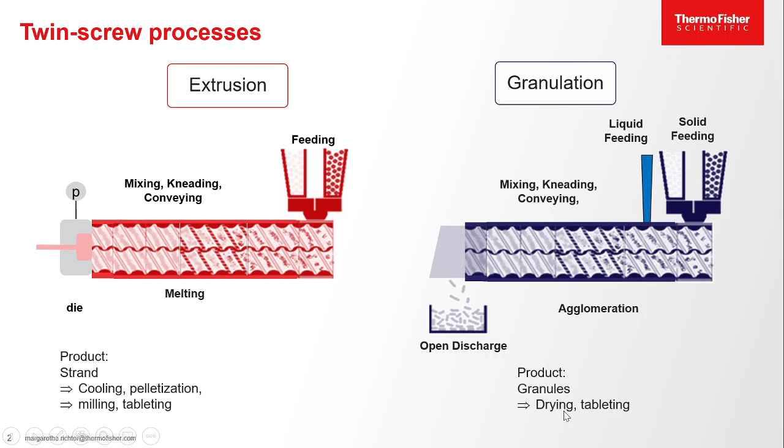And if we have a formulation that is mostly solid, that only has some binder or some liquid added into it, you'll have an agglomeration happening within this twin screw process. So along the screws, you mix the materials and you agglomerate them. So you increase the granule size. And after that, if you add a liquid, of course, you will have to do a drying and a tableting step. Let's look into the process in, let's say, real life.

So what we have here is a benchtop extruder, Pharma 11 is the name. And we have here a gravimetric feeder that's, in this case, feeding the blend. So the polymer with the active ingredient is fed into this funnel here. And then along the barrel inside here, we can set different temperatures. So the temperature profile can be set along, and we make this granulation happen along these long screws.

In the end, we have this discharge chute, and if we remove it just for visibility, this is what it looks like. You have the screws turning, and this is where the granules come out. The rest happens inside, so it can't be seen in detail. And this is what the granules look like. So you have an increased flowability of your granules based on that process. This is a melt granulation process.

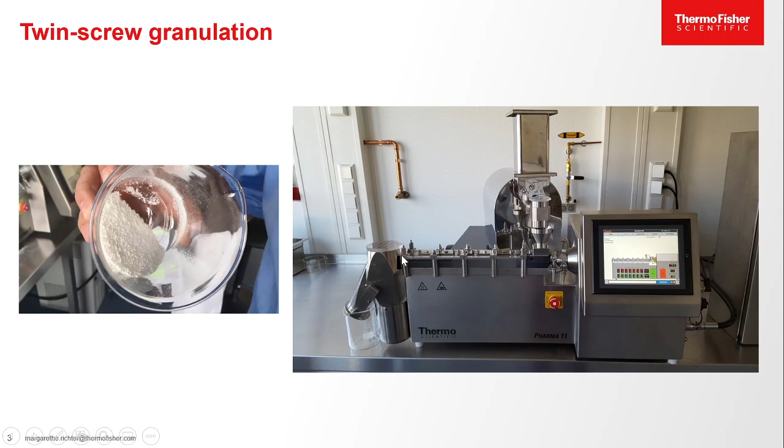I'll come to the differences in a minute, but you can also add a liquid at any point. So here are different plugs, and you can basically remove a plug and then add a liquid here or here into the process. And where you do it really influences the process.

The variables that help you to tune your process are basically divided here into independent variables and dependent variables. Independently, you can continuously change the screw speed, so how fast the screws turn. What's the feed rate, so how much throughput, how much material do I add within an hour, for example, into the extruder. Then the barrel temperature and the temperature profile, and also the liquid to solid ratio. So how much liquid do I add in order to get the granules?

Then stepwise, based on disassembly and then reassembly of the setup, you can change the screw design, so the screw configuration. This is really crucial. I'll come to that later, and also the barrel design. Depending on these changes, you'll get results. And these are basically granule temperature, so the temperature will change based on all these settings.

The drive torque, so how much does the machine actually have to work to perform the granulation, this will change. Also the residence time of your material within the granulator and the filling level inside the granulator. A twin screw process is never completely filled up, but it always has some void volume, and this of course changes. And then you get, of course, quality control parameters such as dispersion, so how well does the material disperse, how big are the granules, so granule size and distribution, and also the granule density.

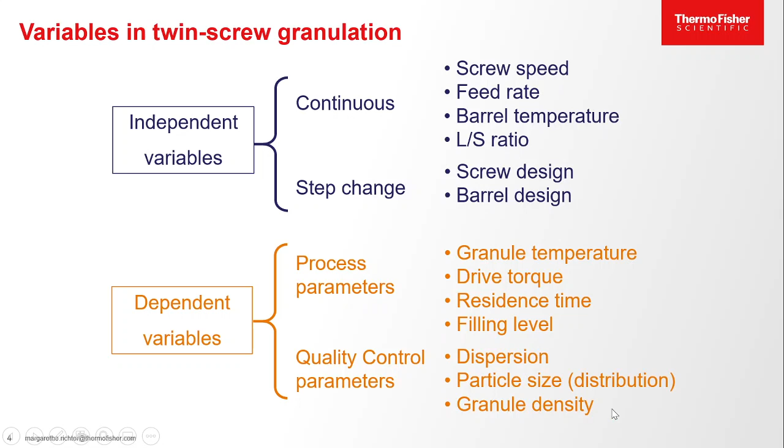And based on these parameters, you can basically change all this. But let's go through this in the consistent methodology. So this is what I suggest for this talk. We will first of all look into the type of granulation process, into the formulation, then into the setup, and then into the process parameters.

So looking into the type of process, well, as mentioned, extrusion and granulation is possible, but granulation also divides into melt granulation or dry granulation, or into wet granulation. If you work without a liquid, so you do a dry or a melt granulation process, then you will have basically a polymeric binder and no water or any other solvent. And you perform the process at elevated temperatures.

It doesn't have to be very high, but depending on the temperature, you can talk about melt granulation here. Basically, then you will have temperature above the glass transition of the polymer, but in most cases below the melting temperature of the API. So you really just melt the binder in this case. This is a very nice process because it's suitable for active ingredients that are sensitive to hydration and also to heat, because the residence time during the granulation process is quite short. So also the residence time at elevated temperatures is short.

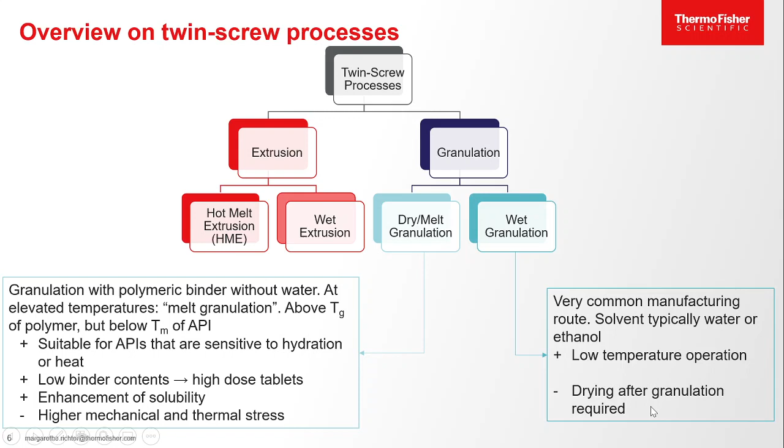Wet granulation, on the other hand, is a very common manufacturing route. Typically, different techniques are used, but all of them have in common that there's a solvent, typically water or ethanol, added into the process. If we perform this with a twin-screw process, then this granulation process is continuous, and this is the big advantage here, for continuous manufacturing. The process itself is performed at low temperatures, so this is a big advantage, but because you add a liquid, you have to dry the liquid afterwards, and you have the solvent handling that needs to be taken care of as well.

And if we look into the difference of the melt granulation and solvent granulation, I won't go into too much detail. You can have a closer look at this in this publication. But what you can see, based on metformin as an API, they made a case study and they got a lot nicer tablet hardness based on the melt granulation made granules. And the authors state that melt granulation was clearly superior to solvent granulation. So it makes sense to look into it and compare it.

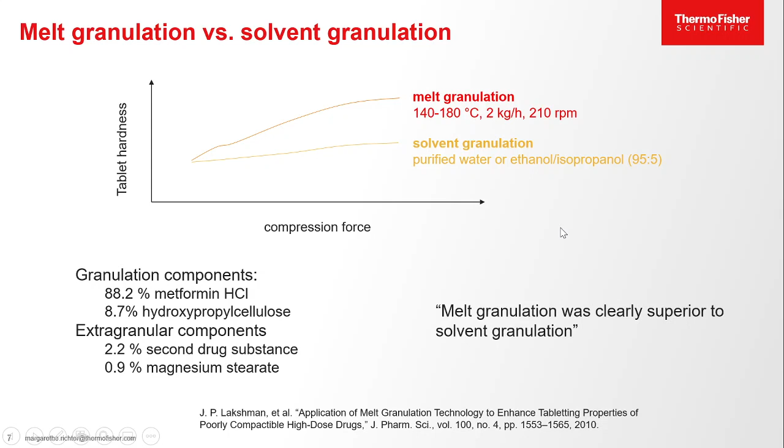Then let's look into the formulation. Well, basically you can have a pre-blend or a split feed. So you basically feed your solids separately, and let the extruder or the twin-screw granulator do the work of mixing. Then you can choose different liquids. Of course, what kind of solvent do we want to work with? And you can add the binder into the solvent or into the pre-blend. And this is a question we have discussed in this slide.

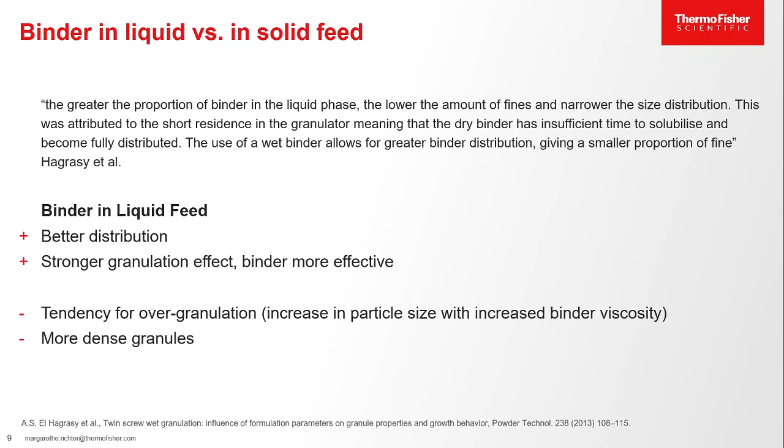There's a little bit more in this publication again, but in a nutshell, you get a better distribution and stronger granulation effect, so a more effective binder, if you add the binder into the liquid. But you have also the tendency to overgranulate, to make lumps and really large particles and to get quite dense particles.

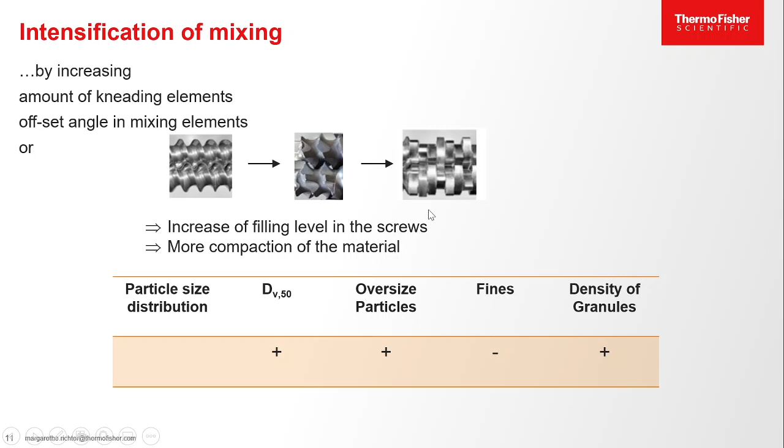And by doing so, I get an increase of filling level in the screws, especially in this kneading section. And this will lead to more compaction of the material. The effect is, of course, we'll get larger granules on average, we'll get more oversized particles, less fines, and we'll get more dense granules. So this is a really brief summary. Of course, there's a lot more details to discuss, but please contact me if you have questions on that.

So let's look into the process parameters. Here we have a short case study of a wet granulation process based on mostly a lactose placebo formulation with PVP 30 as a binder and water that is used as a liquid. We checked this on different sizes of extruders, so Pharma 11, 16, and 24, so we could really increase and scale up the process. Gravimetric feeding is used, and we also did some inline measurements of the granules.

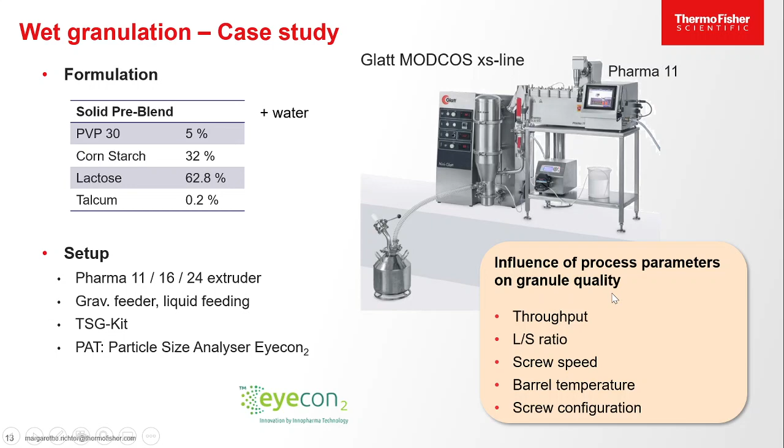Here you can see on the right-hand side a process set up on a benchtop where we have basically a Pharma 11 granulator, and I'll always focus on the granules that are made from the granulator itself, but you can actually directly connect it to a fluid bed dryer. Here we cooperate with Glatt and have a semi-continuous granulation system on a benchtop, and of course the larger systems, the Pharma 16 and the 24, will always be fully continuous. And if we check all these process parameters, so what's the influence of the process parameters on our granules? You'll see there's quite some impact.

Here we have a summary of the throughput and the screw speed. So if we increase the throughput on the Pharma 11, for example, coming from 0.5 kilogram per hour up to 3.5, which is probably challenging. So this is a model based on some trial results we have. You'll see that increasing the throughput will increase the average particle size, so the mass median diameter. And this is because you basically feed more material into the screws, and by doing so, you fill up the screws at a constant screw speed. You fill up the screws more, and this leads to more compaction and larger granules.

The opposite happens if you increase the screw speed, so from 100 up to 900 RPM. If you increase the screw speed, granules become smaller on average, because again, the screws empty more. You have less compaction happening, and smaller granules result from that process. So basically, the recommendation is if you want to increase the throughput, this should always go along with an increase in screw speed in order to keep the granule size constant. But on the other hand, you can basically tailor your particle size distribution or your average particle size by changing the filling level here, based on these two parameters. So these are very important.

And in a nutshell, if we look into all these process parameters, if you increase the liquid to solid ratio, which basically happens for all wet granulation processes, you'll get larger particles on average and more dense particles. If you increase the throughput, as I mentioned before, larger particles, even a wider particle size distribution, and the density is also higher. Then if you increase the screw speed, the opposite happens, smaller granules. But this is always happening in a certain range. There are exceptions to this rule, right? So if you have questions on that, again, don't hesitate to contact me.

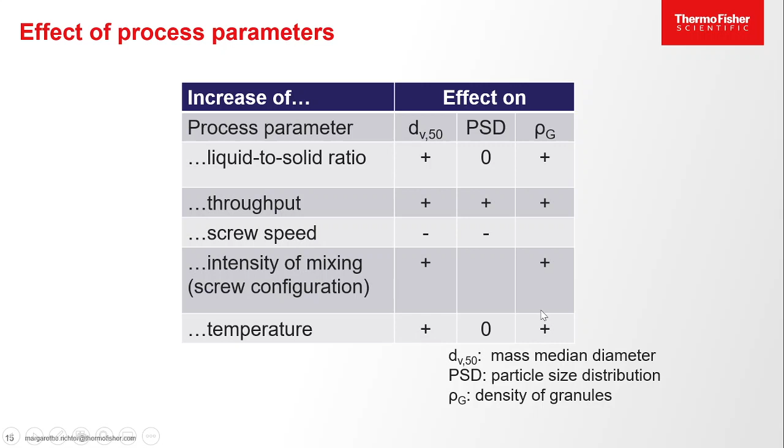Then if you increase the amount of mixing, so intensify the mixing by changing the screw configuration I mentioned before, here you will get, again, larger granules on average and more dense granules. And by increasing the temperature, you also get larger granules because you basically have a more efficient binder at higher temperatures, and also more dense granules.

So typical errors that happen in twin-screw granulation, I think it does make sense to have a closer look into that topic as well. What I see quite often, especially in publications, is that the researchers work with fixed screw configurations. So they have the setup the way it is. They hesitate to change anything in the configuration, which is maybe a good start point, but it really limits the design space. So keeping this fixed will limit you a lot, and it makes sense to change the screw configuration and adapt it to what you need, to your formulation.

Then again, what you see quite often is this bimodal distribution of granules, and people state that this is due to these two screws and so on. This is, frankly speaking, nonsense. You have a bimodal distribution if you have inaccurate feeding, and especially the ratio of liquid to solid. So if your liquid is not well distributed into the granules, you'll not get a good particle size distribution. Therefore, this can lead to an inhomogeneous product, so you get very fine material and then again very large material, but nothing in between. So this is really something to look into. Feeding is very crucial in twin-screw granulation.

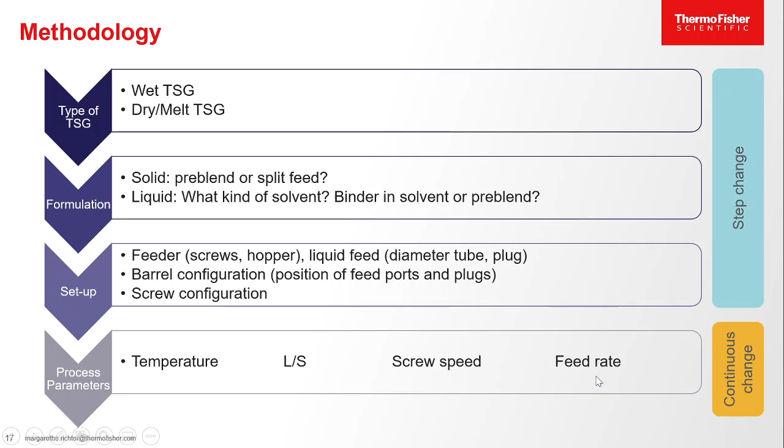And to summarize this, basically all these steps here are step changes. So you do a trial and then you reassemble everything, change something in the configuration and start again. Whereas everything down here is continuously happening. Because you have a continuous process, you can continuously change some of these, let it run for a couple of minutes and you'll see the effect. And if you want to have process optimization, then these can be either made stepwise or continuously. And I have some examples here.

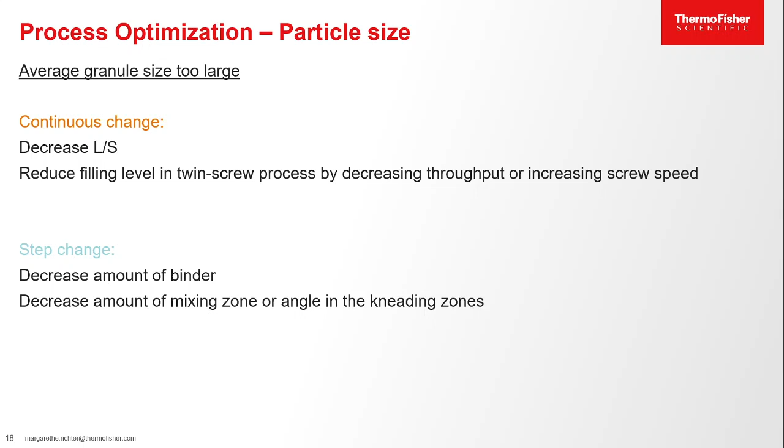So let's say your average granule size is too large. What can I do on a continuous level? Well, that's the simplest thing. Too large granules, decrease the liquid to solid ratio, and then you'll have smaller particles. But you can also reduce the filling level in the twin-screw by decreasing the throughput or increasing the screw speed, and this will also lead to smaller particles on average. Then a step change could be to decrease the amount of binder, so change the formulation slightly. And you can also change the screw configuration by decreasing the amount of kneading elements in the zone or decreasing the angle.

Another example, if we talk about the particle size distribution: if you have a very wide distribution and many oversized particles and fines and also a pulsing flow of the granules, what can I do about it? In this case, it makes sense to increase the residence time. So if you increase the residence time, the granules have more time for the granulation, you have a bit more back mixing effect, and this will make the system more consistent. So you can do this by decreasing the screw speed or the throughput. Both things will lead to a longer residence time.

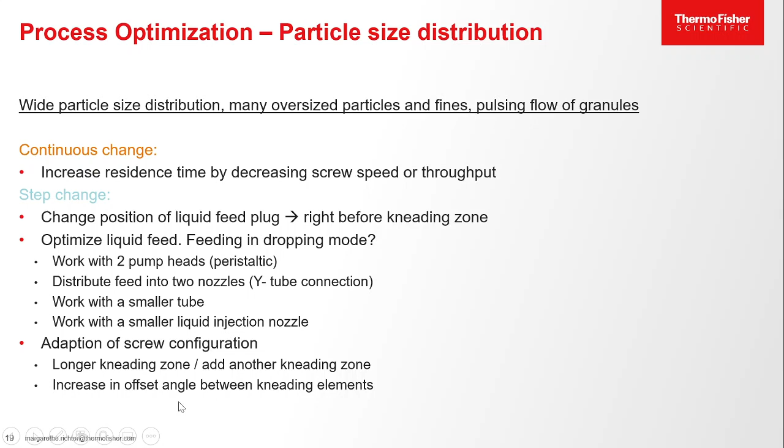Then stepwise, of course, you can think about the liquid feeding, especially the position of the liquid feeding, and also is the liquid feed optimized? That means, do I have some dropping mode, so it is not really homogeneously coming out of the pump? In this case, it might make sense to work with two pump heads, or have several nozzles, or work with a smaller tube. These things can help you to get a more homogeneous flow of the liquid into the granulation process. And then again, you can adapt the screw configuration. A longer kneading section can help you to increase the residence time, or an additional kneading section, and also increasing the offset angle can help.

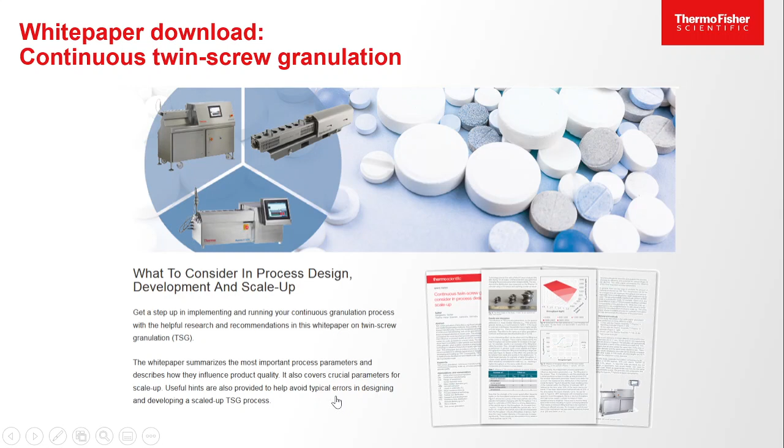There are more details to share, and you can find something in this white paper. You can download it from our webpage. And there are some references worth mentioning, so have a closer look.